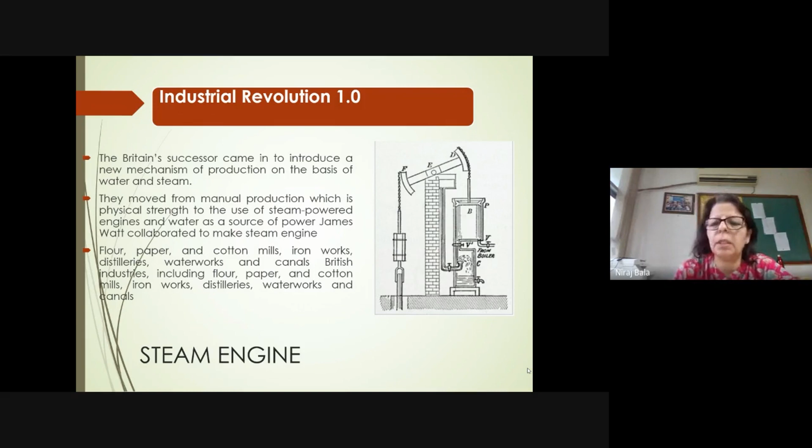Not only this, before that, all transportation used to be either manual or with the help of animals. But with the concept of steam, they introduced steam powered locomotives. Steam powered locomotives means the transportation from one place to another, whether of passengers or goods, also became easier and faster. Similarly, they used these steam powered engines in boats also. So instead of manual boats, now they had steam powered boats, or you can say ships. So that is what actually happened during those days.

Britain, when they had the East India Company and were ruling our country, used to take raw material from us, the cotton and other raw material, and they used their own machinery for weaving that cotton into cloth, and then they used to sell that cloth at an expensive price.

That is why during that time period these were the rich countries, because they had the power of machinery, they had the power of technology. So dear participants, it is very important that you have the power of technology so that you are able to go along with the other countries.

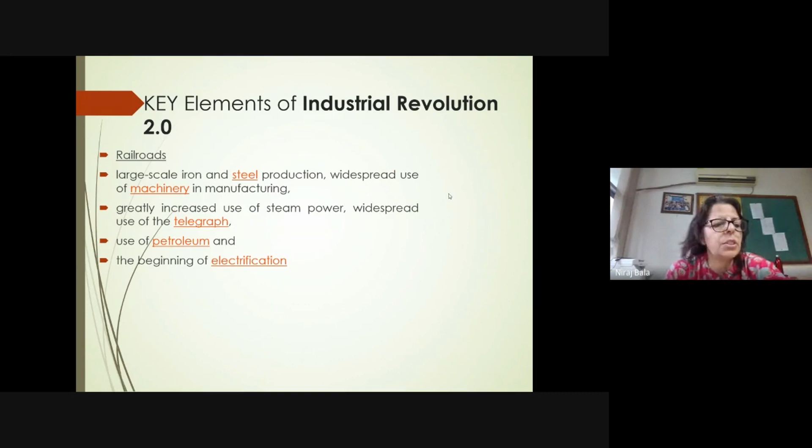Until now, Industrial Revolution 2.0 is considered the most prominent and most revolutionized among the other revolutions. Now the conveyor belt thing had come. From the conveyor belt, some automation had already started with conveyor belts being used. Based on that, partial automation also started coming in Industrial Revolution 3.0.

So the major two things were memory programmable controls - that means you give some commands and the machine can do some operations - and of course another very important revolutionary thing which came in Industrial Revolution 3.0 was computers. The introduction of these technologies allowed us to automate an entire production process. Initially there were only conveyor belts.

Automation of industries started during industrial revolution 3.0. Computers and memory programmable controls were the two major things of this industrial revolution, which also brought the rise of electronics, telecommunications, and computers. Two other things that gained momentum were space expeditions and research, as well as biotechnologies. PLCs and robots were also major developments during industrial revolution 3.

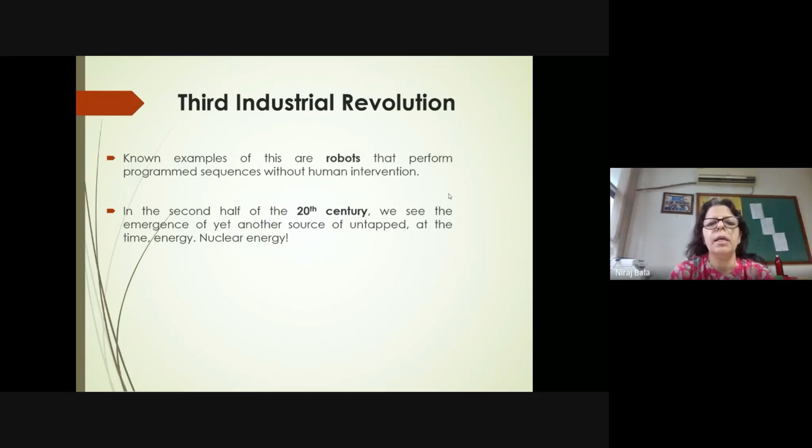In the second half of the 20th century, we see the emergence of yet another source of untapped energy, that was nuclear energy. This was another very important development of the third revolution.

Now the fourth revolution. Dear participants, we are all currently implementing the fourth industrial revolution. This is characterized by the application of information and communication technologies to industry, and we call it Industry 4.0. At many places you will see I 4.0, Industry 4.0, or Industrial Revolution 4.0. So after the third revolution, we came to this fourth industrial revolution, which is taking place now. I will also show you in further PPTs how Industry 4.0 will now be taken forward by the metaverse. So let us first understand Industrial Revolution 4.0.

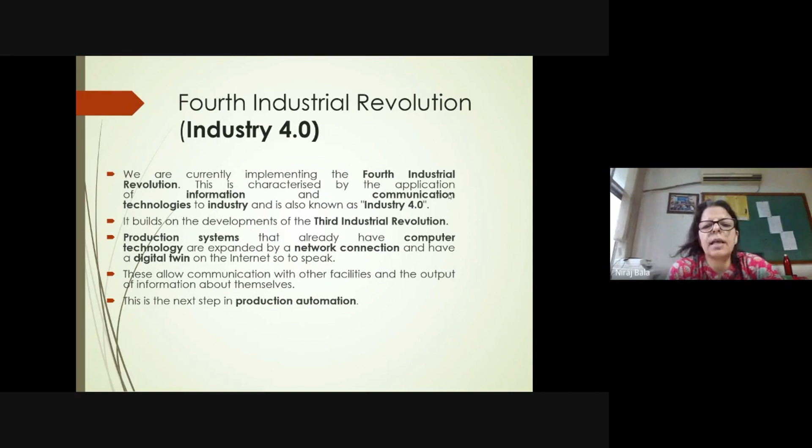The production systems that we already had, using computer technology, started expanding using network connection and a digital twin. This is a very important point, digital twin. I will show you one or two videos and elaborate more on the digital twin, because this is a very important aspect in your industrial metaverse - digital twin on the internet, so to speak. These allow communication with other facilities and the output of information about themselves, and we call it the next step in production automation.

Now, what are the various technologies? There are a number of technologies. Some of the important ones driving this fourth industrial revolution are big data analytics, autonomous robots, artificial intelligence, horizontal and vertical integration, industrial Internet of Things, cybersecurity, additive manufacturing, and augmented reality. I have listed some of the technologies driving Industry 4.0. You must have already heard about some of these, like augmented reality and virtual reality. I will not go into detail, just a brief about these technologies driving Industry 4.0.

Dear participants, most of you are from engineering colleges or polytechnics. So why is there a requirement of knowing about Industry 4.0 technologies? By the time your students finish their diploma or their degree, they should definitely know these prevalent technologies. As I showed in the previous slides, when an industrial revolution came, if you do not adopt that new technology, any country or region that does not adopt it will be left behind.

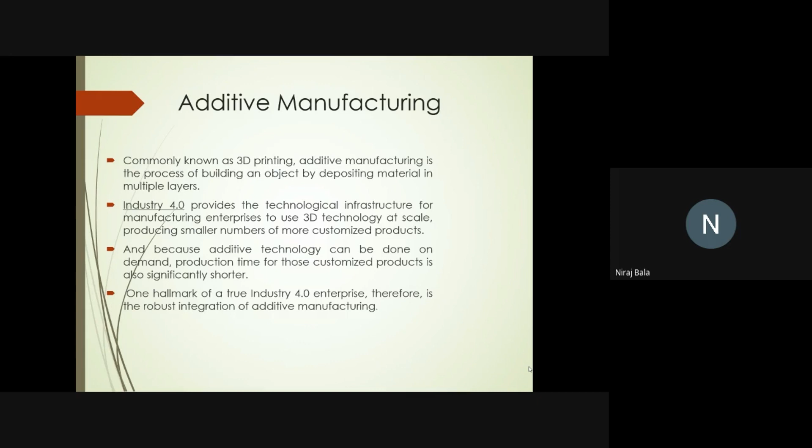So a brief about what additive manufacturing actually is, it is very simple to understand. These days, many schools also have 3D printers. In engineering colleges and polytechnics too, I would suggest having these small additive manufacturing 3D printers, so students can understand, work with them, and actually produce some 3D printed products.

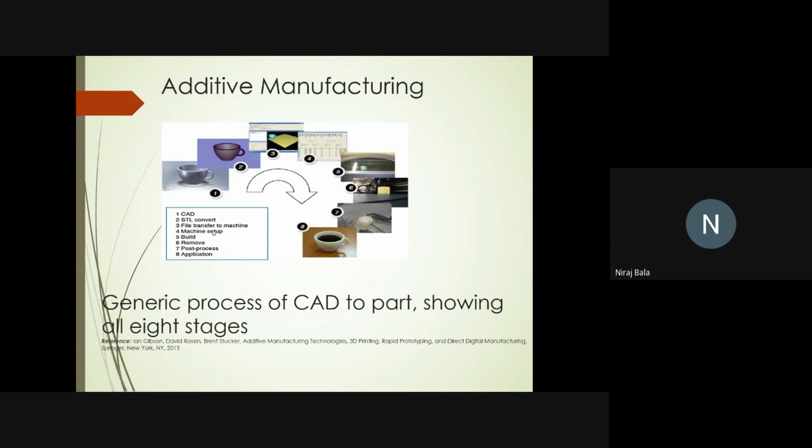So what is the major advantage of additive manufacturing? The final shape which you want, you just feed that final shape into the machine, and the same product will be manufactured automatically by using this machine. So dear participant, it is very simple, and I would suggest that in your institutes you should have one or two of these 3D printers, so that the students can have an idea how to 3D print the products.

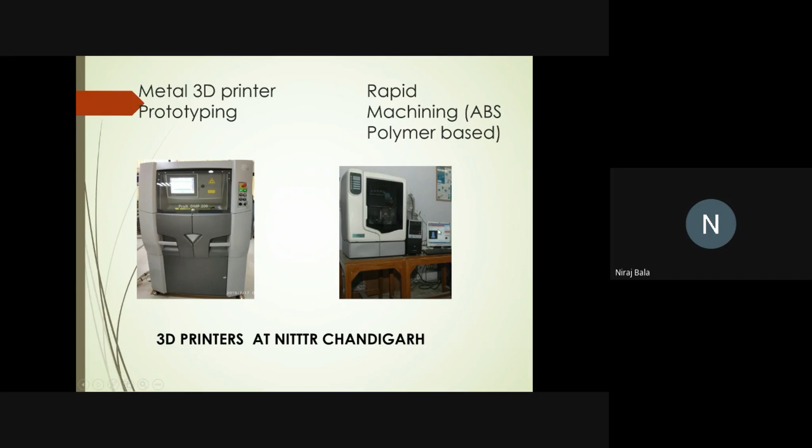So I have taken these photographs of our institute from our department. Metal 3D printer. We have a metal 3D printer also. So stainless steel, titanium, and other metals can be printed using this 3D printer. And we have a rapid ABS polymer based printer also. So these are the two printers.

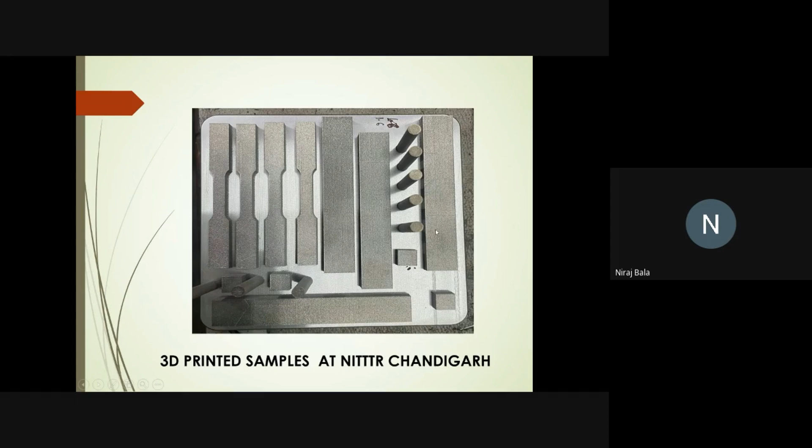And this is one 3D printed sample of one of my students who actually 3D printed it by using steel, 17-4 PH steel. So these were the different shapes which we wanted for our testing purposes, tensile pieces, simple pieces. So we 3D printed it on the machine. If you see here, this is the base plate. On the base plate, the product is printed, and then you remove the product from the base plate. So whatever command you give, the actual shape will be produced by using this 3D printing.

Now, what are the various applications where you can use this 3D printing? The major application is in our body parts, which we call bioimplants. Whenever there is some surgery, these days it is very common. Many of us are getting our knees replaced, knee surgeries are there, hip and knee implants are there. Or if somebody has some accident, they put some rods inside your body. So sometimes some specific shape is required for a particular part. So that can be done.

Patient specific shapes can be produced by using this 3D printing or additive manufacturing. So the specific shape can be done by using this 3D printing. So bioimplants can be done these days. The dental implants, they are also done by 3D printing, the dental implants which we have when we remove our teeth.

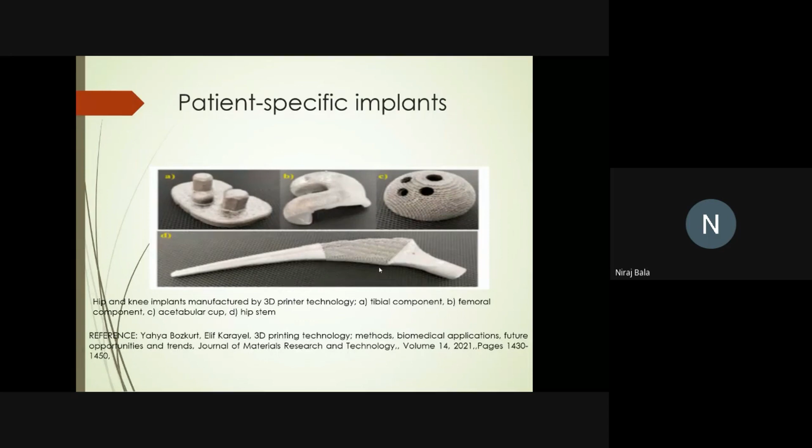Another very important application, a future application of 3D printing, is bioprinters. Have you heard about these bioprinters? So we have one bioprinter at our institute. What is the purpose of this bioprinter? See, in the previous slide, we only talked about these metal implants, which are required to be replaced. But now you can also produce the tissues. You can also replace the tissues. So have you heard about these stem cells?

Now when a baby is born, they keep the stem cells of that newborn baby. The purpose of that is that in future, if he has some ailment or some disease, they will use that cell from there, and they will reproduce the cells, and they can heal many diseases. You must have heard about this. So this is a new latest technology which is being used, that is biotechnology, which we call the tissue engineering applications of 3D printing.

Now what they do, they remove the cell from your body. This is cell isolation. I will just tell you briefly. A lot of research is now going on in this tissue engineering, and then they will produce that cell culture in the lab. Using your cell, they will grow more cells outside your body, and then, in order to give it strength, a scaffold is prepared. This 3D printed, mesh type of thing is prepared using these 3D printers, bioprinters.

Because along with the cell, we require some strength also. So using this scaffold which has been 3D printed, these cells will be grown over it, and the entire tissue is grown outside. In order to give it mechanical strength, we have this scaffold which has been 3D printed, and this tissue or the cell is grown outside. So this entire tissue can now be implanted in your body, and it can replace a bad tissue, or the tissue which is not working properly.

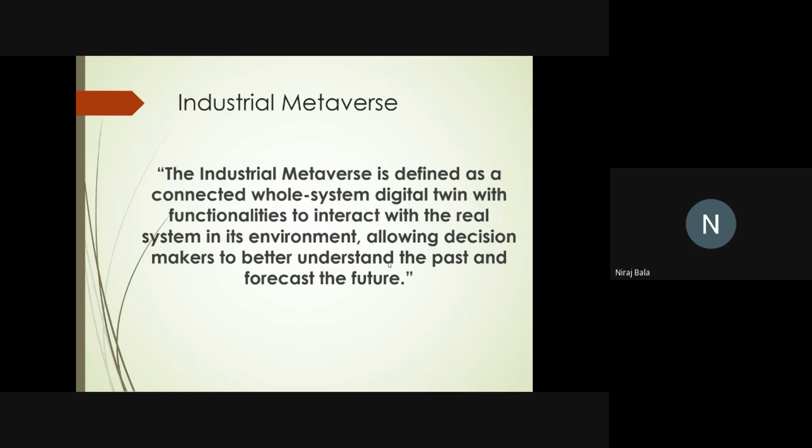A very important aspect of the industrial metaverse is the digital twin, and I will explain more about it. Some of the major giants have their own definitions of the industrial metaverse. Siemens calls it a virtual world in which we can interact in real time with photorealistic, physics-based digital twins of our real world. We believe digital twins are the building block for the metaverse. So for the metaverse, digital twins are very important, and similarly in industry this digital twin is there.

Participants, a very simple word to understand this digital twin is simulation. The models, the 3D models we used to have in the olden days, the simulations we used to have, have now been converted into a digital twin.

Another definition is that the industrial metaverse enables industrial companies of all sizes to create a closed-loop digital twin with real-time performance data, which is ideal for running simulations and AI-accelerated processes for advanced applications such as autonomous factories that rely on intelligent sensors and connected devices. So, a real-time persistent simulation space. Basically it is a new virtual world taking data and inputs from the real world, and based upon the previous data it has, it will give you some outputs. These are some of the definitions given by different industrial giants, Microsoft and others, in their own views of the industrial metaverse.

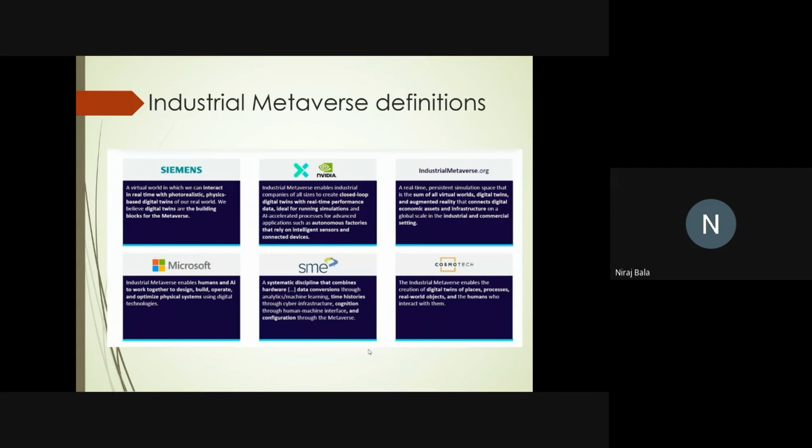So in order to understand this digital twin, I will show you one video, and after that we will see the various applications of this industrial metaverse. What are the major applications where this industrial metaverse is being used? So first of all, a brief 2-minute video in order to understand what is this digital twin.

Let me show. Now let us understand some of the advantages and disadvantages of Industry 4.0. The advantage, see, one major thing I have already covered before, is that if you do not go along with the technology, you will be left behind. Whatever new technology is coming, as a country or as individuals, we need to adopt the new technology, otherwise we will be left behind.

So the advantages of Industry 4.0 are that productivity is fast, more flexibility is there, more profits can be gained, and you have a better customer experience. You can work more safely when you are working with machines. Then optimization is there and customization is there, like in 3D printing we saw, that you can customize the products according to the requirements by using Industry 4.0.

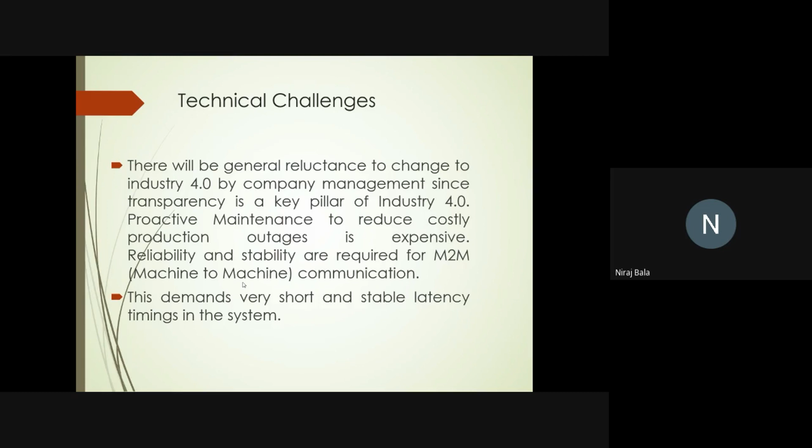Then, under technical challenges, there is a general reluctance to change. Whenever a small change comes in any industry or organization, all levels of management have many technical problems. Since the internet came, transparency is the key issue. Many things are being done online, and when we do things online there is more transparency, so this is another pillar. Proactive maintenance to reduce costly production outages is expensive, and reliability and stability are required. This demands very short and stable latency timings in the system.

Other technical challenges involve integrity of production processes. Machines by themselves have their own limitations. They cannot perform complicated or non-repetitive tasks. See how machines work through artificial intelligence: we give them some previous data, and based upon that they make decisions.

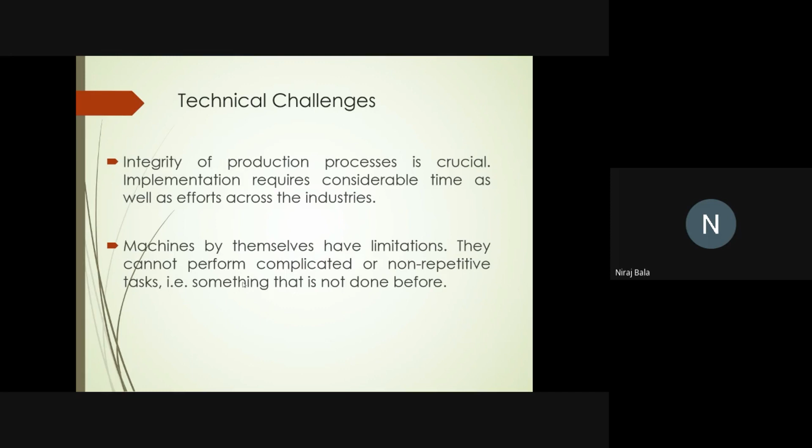But suppose something new occurs: there is a factory and some machine catches fire. If a worker is standing there, he will switch off the machine and tell the other workers to come outside or use some mechanism to extinguish the fire. But does the machine know it has to stop because there is fire or smoke? So can we leave machines 100% on their own to accomplish the work? Again there is a question mark, and a technical challenge involved.